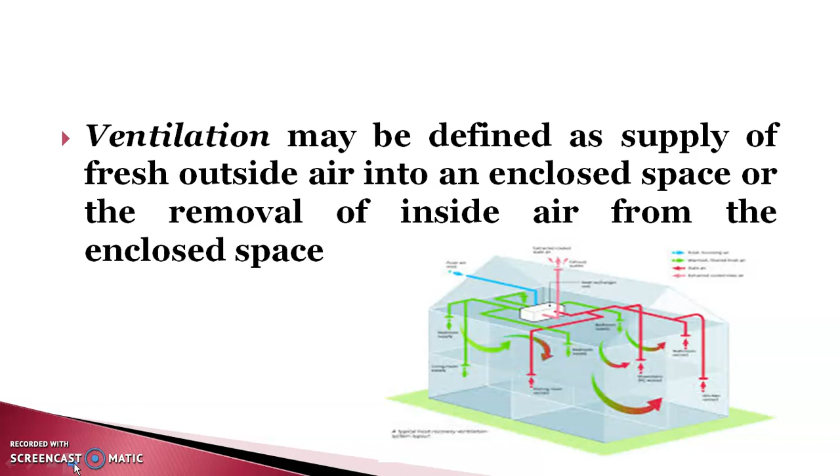Why do we need to ventilate a space? We need to ventilate for the creation of free air movement, prevention of undue accumulation of carbon dioxide exhaled by the users, prevention of flammable concentration of gas vapors from locations like kitchens, and prevention of accumulation of dust and bacteria carrying particles.

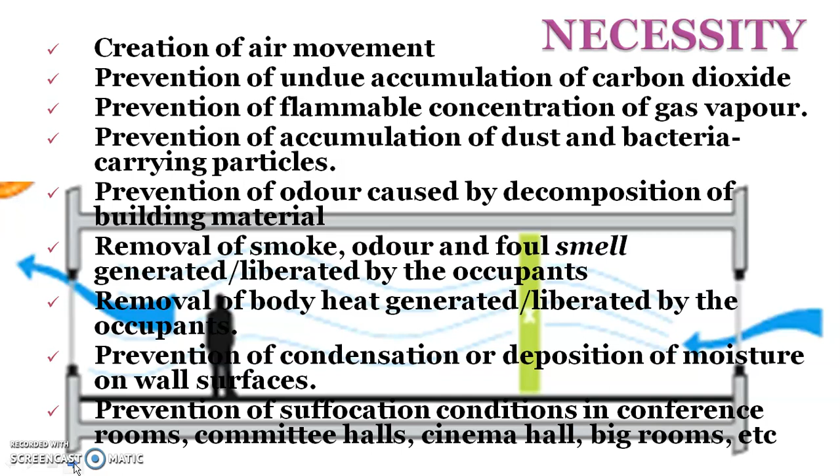Other reasons include removal of smoke, odor and foul smell generated by occupants, removal of body heat generated by occupants, prevention of condensation or deposition of moisture on wall surfaces, and prevention of suffocation conditions in large rooms like conference rooms, committee halls, cinema halls, and big rooms.

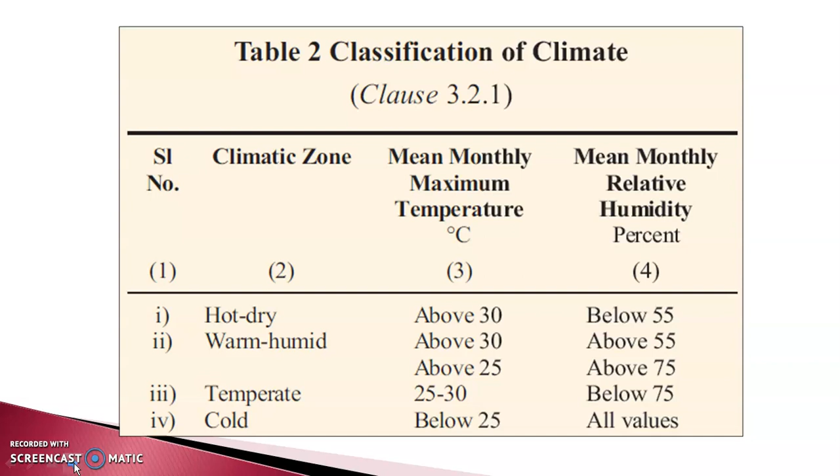This table shows the different classification of climate. These are recommendations from the National Building Code of India, clause 3.2.1, which divides the zones of India into different climatic zones like hot dry, warm humid, temperate and cold. The mean monthly temperature and mean monthly relative humidity conditions generally divide the climate into these various zones.

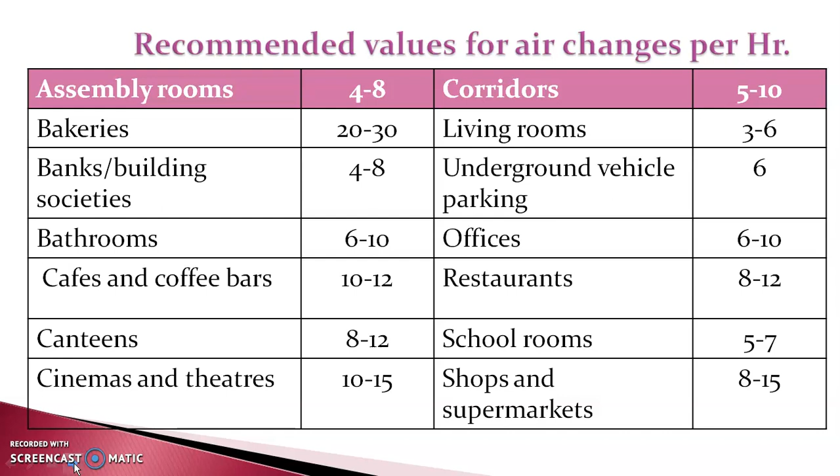Meaning, if an assembly room has a volume equal to x meter cube, then we need to change its air at least 4 to 8 times the x meter cube so that effective ventilation can be achieved. These values differ for different rooms, and we need to follow these conditions for effective ventilation.

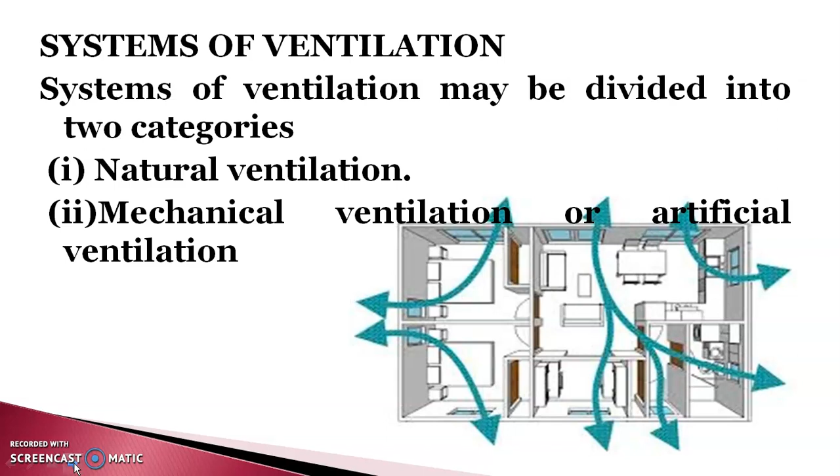Systems of ventilation may be divided into two categories: natural ventilation and artificial or mechanical ventilation. Natural ventilation is effected by the elaborate use of different openings like doors, windows, ventilators and skylights. It is usually considered suitable for buildings and small houses.

However, it is not useful for large buildings, offices, halls, auditoriums and large factories, where the volume is very large and the openings are comparatively smaller, so the expected amount of air change may not be achieved just by natural forces. In natural ventilation, cross ventilation is normally relied upon to secure air movement. It is economical since no equipment is required for keeping the room ventilated.

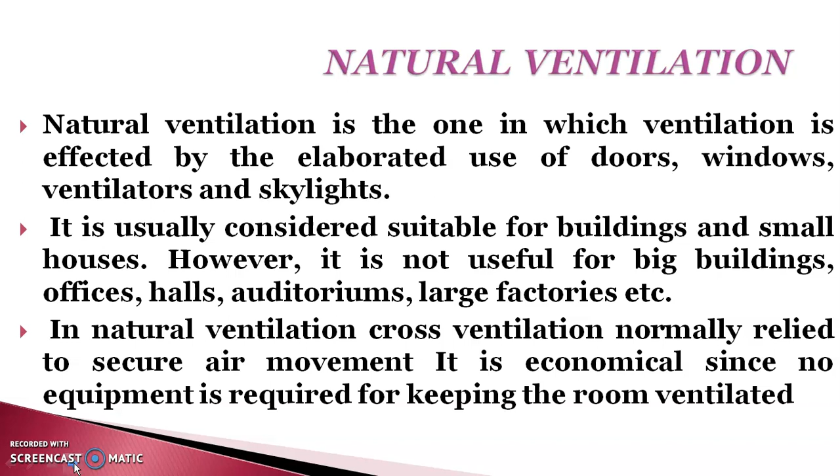In natural ventilation, the rate of ventilation depends on two effects: wind effect and stack effect.

In wind effect, the rate of ventilation depends upon the direction and velocity of wind outside, and the size and position of openings. Such an effect is known as ventilation due to wind action. In designing a system of natural ventilation, the aim should be to make effective use of wind forces.

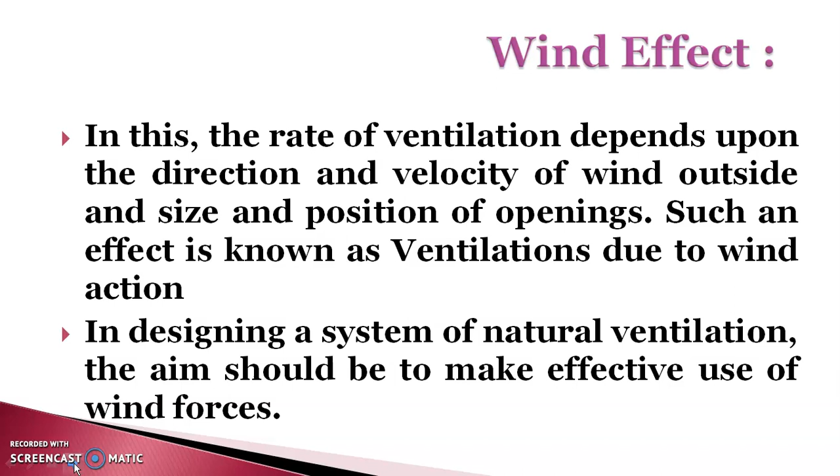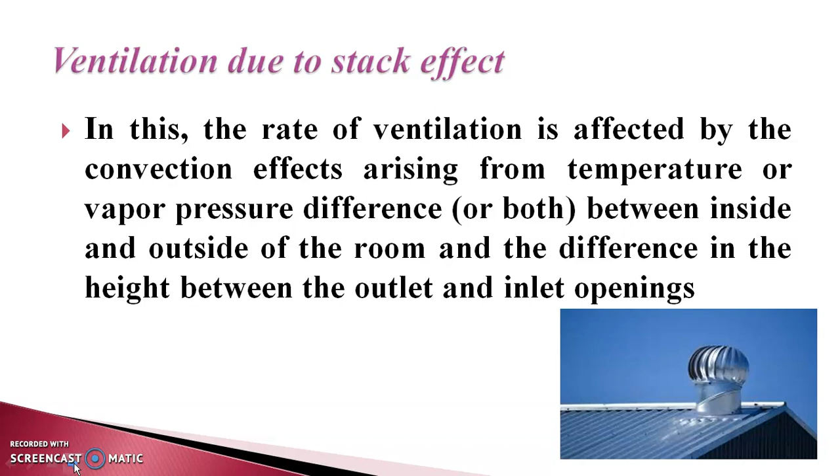Ventilation due to stack effect: here, the rate of ventilation is affected by convection arising from temperature or vapor pressure difference, or both, between inside and outside of the room, and the difference in height between the outlet and inlet openings. When air temperature inside is higher than outside, warmer air rises and passes through openings at the upper part of the room, while incoming cool air enters from the lower opening. This is the major principle used in this type of natural ventilation.

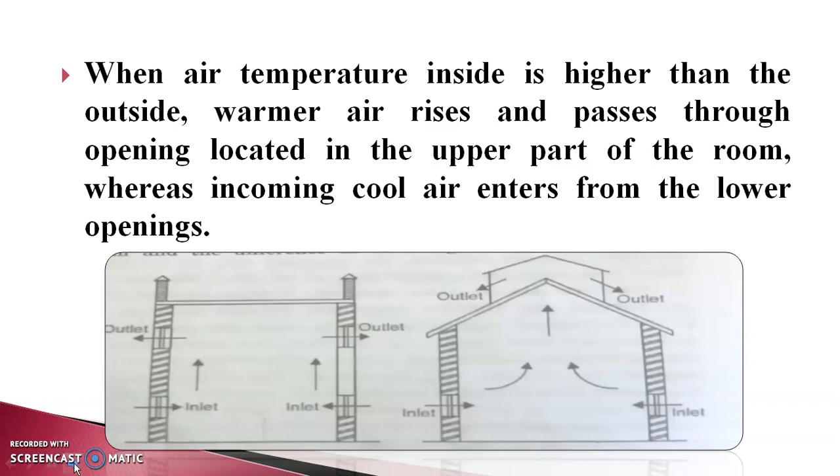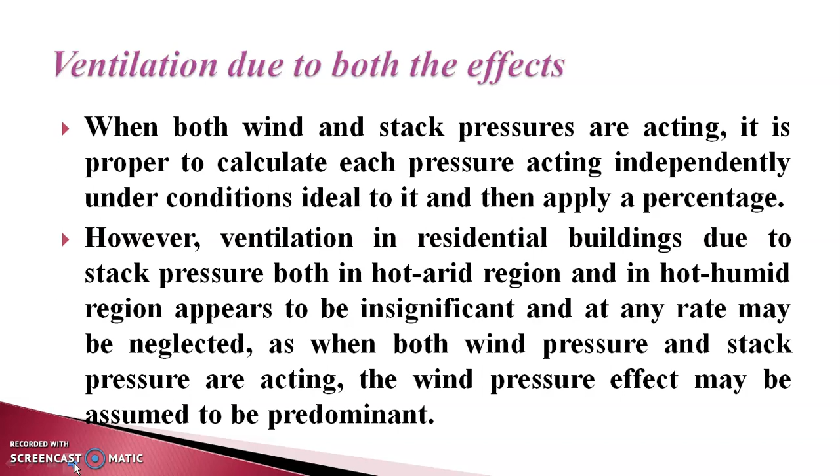When both wind and stack pressure are acting, it is proper to calculate each pressure acting independently under ideal conditions and then apply a percentage. However, ventilation in residential buildings due to stack pressure, both in hot arid and hot humid regions, appears insignificant and may be neglected, as when both wind pressure and stack pressure are acting, the wind pressure effect may be assumed to be predominant.

Next is mechanical or artificial ventilation. It involves the use of mechanical equipment for effective air circulation. It is provided where satisfactory standards of ventilation in respect of air quality or controllability cannot be obtained by natural means. This system is costly, but results in considerable increase in the efficiency of persons.

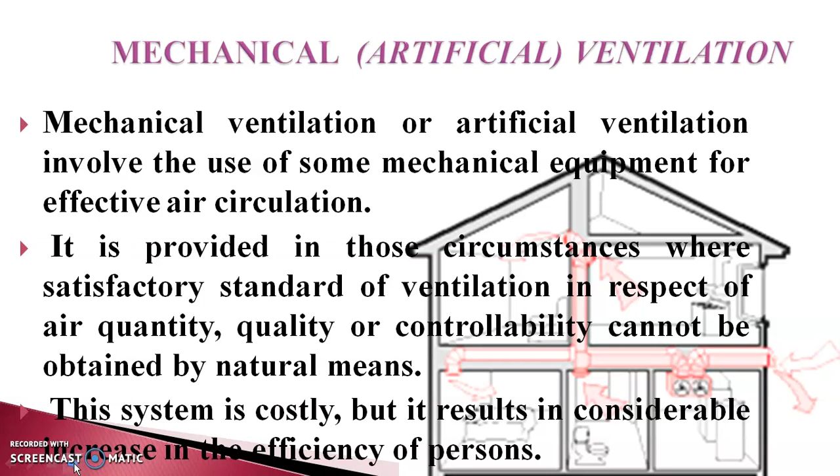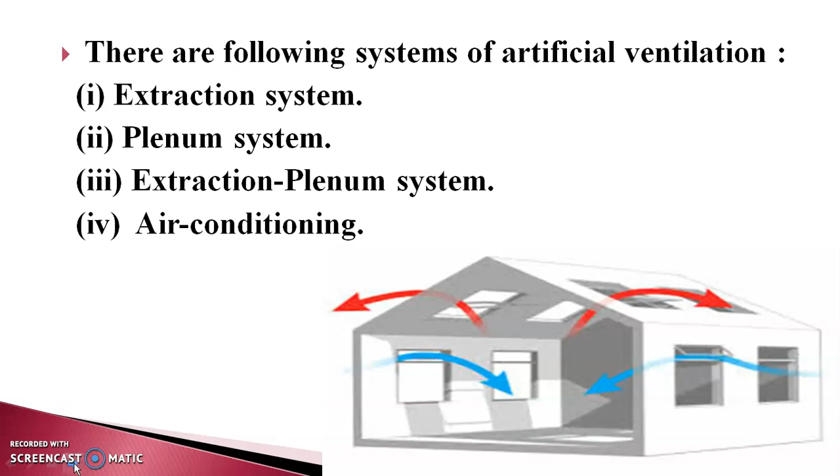There are following systems of artificial ventilation. First is extraction system, second is plenum system, then the combination of these two, extraction plenum system, and the air conditioning.

In extraction system, which is even called an exhaust system, vacuum is created in the room by exhausting the stagnant or inside air by means of propeller type fans, popularly known as exhaust fans.

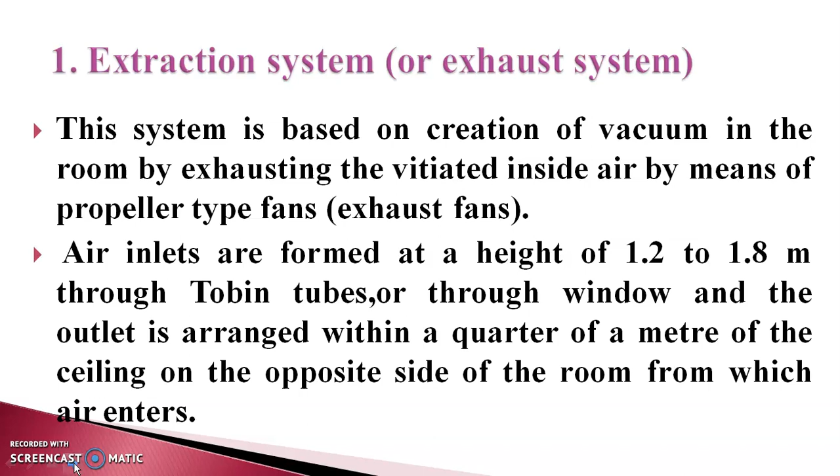Air inlets are formed at a height of 1.2 to 1.8 meters through Tobin tubes or through windows, and the outlet is arranged within a quarter meter of the ceiling on the opposite side of the room from which air enters.

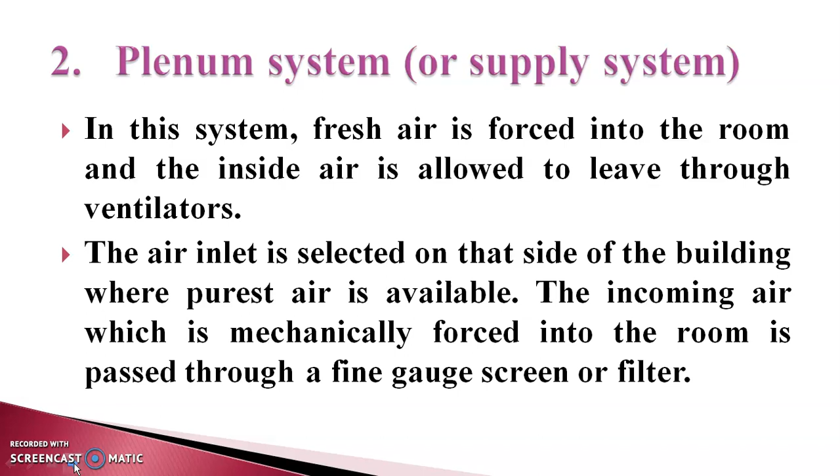Plenum system or supply system: in this system, fresh air is forced into the room and the inside air is allowed to leave through ventilators. The air inlet is selected on that side of the building where the purest air is available most of the time. The incoming air, which is mechanically forced into the room, is passed through a fine gauge screen or filter.

In winter, the air may be forced through a battery of hot water tubes and heated before being forced into the room. In case of big halls or factories, distribution of this air is done through properly formed sheet iron ducts with properly dimensioned branches. This ventilation system is costly and is used for factories, conference halls, theaters, big offices, etc.

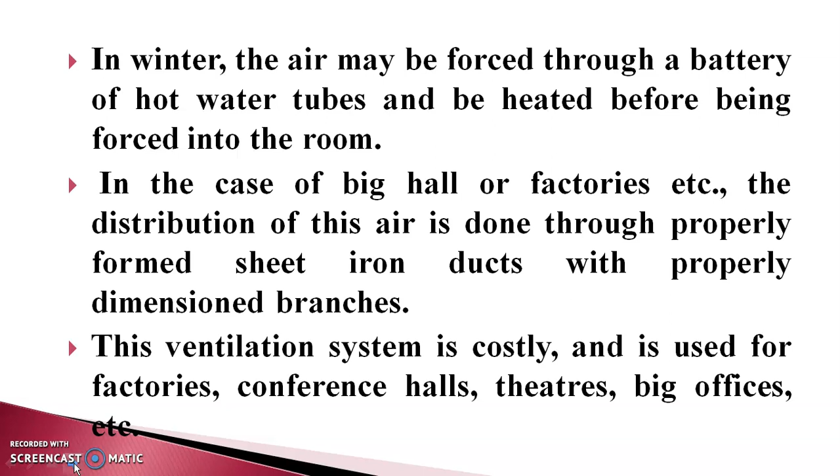Extraction plenum system: this is an extension of the plenum system in which extraction fans are used for the exit of vitiated air from the room. This system is adopted where delivery of fresh air is either sluggish, or where it is desired to discharge vitiated air containing obnoxious fumes, as from kitchen, latrine, or various manufacturing processes in specially isolated areas.

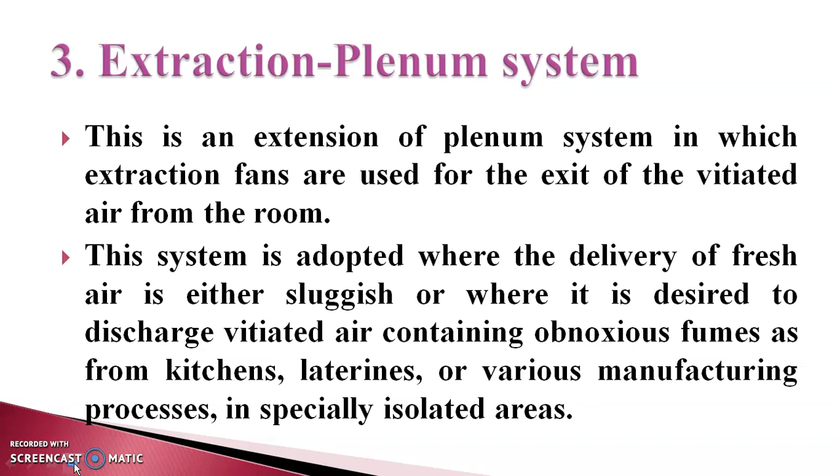Air conditioning: Air conditioning may be defined as the process of treating air so as to control simultaneously its temperature, humidity, purity and distribution to meet the requirements of the conditioned space.

This is the best system of artificial ventilation, in which provision is made for filtration, heating or cooling, humidifying or dehumidifying, etc., thus creating the most comfortable working conditions.

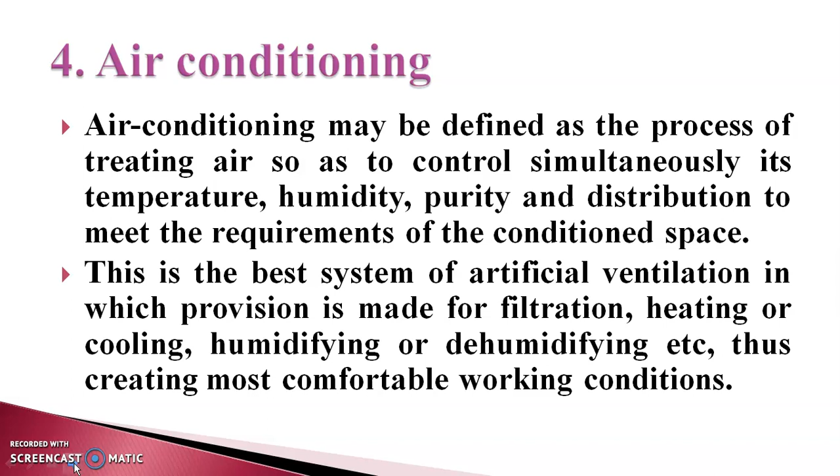Necessity or purpose: in residential buildings, it is required to preserve and maintain the health, comfort and convenience of the occupants. In case of industries, air conditioning may be required to preserve the quality of the industrial product and to create, control and maintain the working of different processes such as artificial silk, cotton cloths, etc.

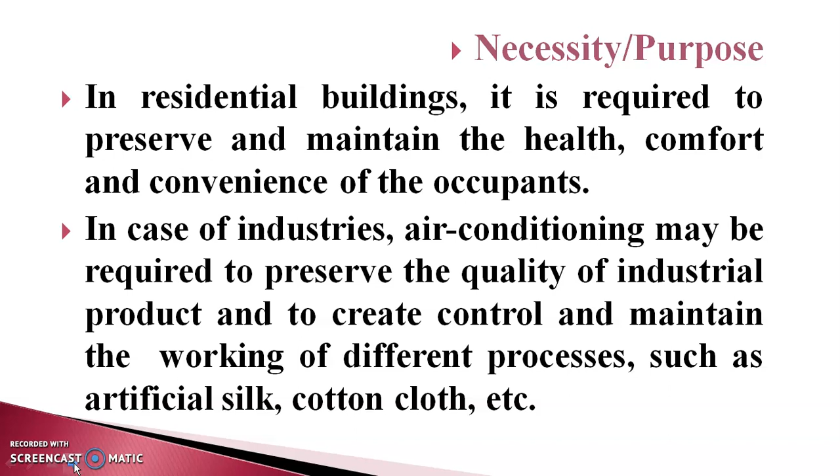Classification: from the functional point of view, air conditioning is classified into two types: comfort air conditioning and industrial air conditioning. In comfort air conditioning, such conditions of the air inside the room are created as would give maximum human comfort.

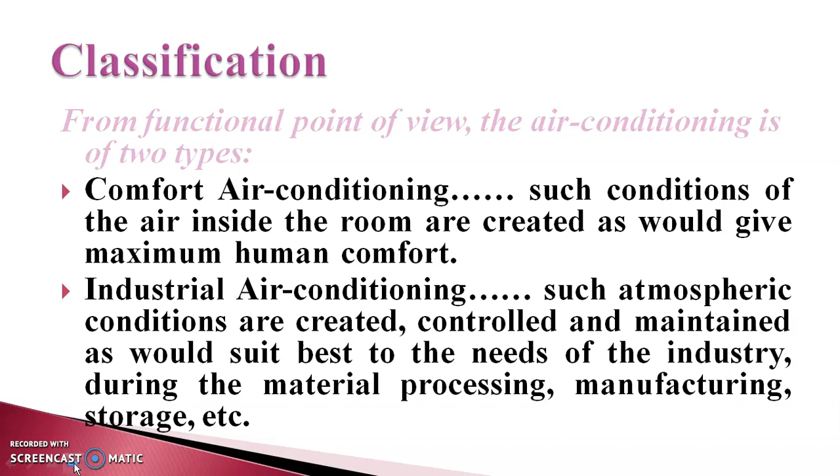In industrial air conditioning, such atmospheric conditions are created, controlled and maintained as would suit best the needs of industry during material processing, manufacturing and storage, etc.

Components of air conditioning system: the following are the essentials of an air conditioning system. Air conditioning systems have filtration and a heating system, which is essential for supplying air at higher temperature.

These are essential in the winter season. Then a cooling system, which is more essential in the summer season. Then humidification and dehumidification as per the need, and air circulation or distribution.

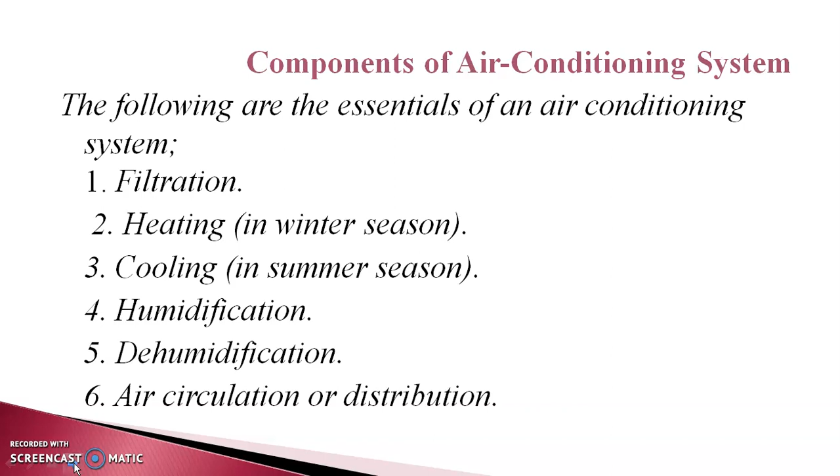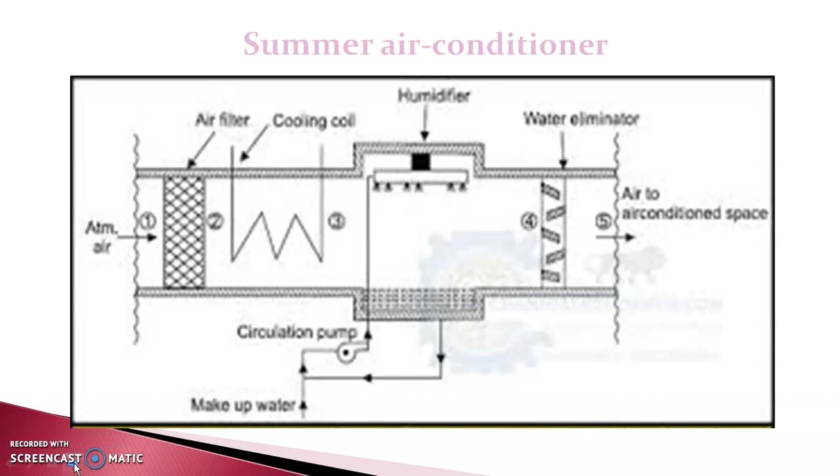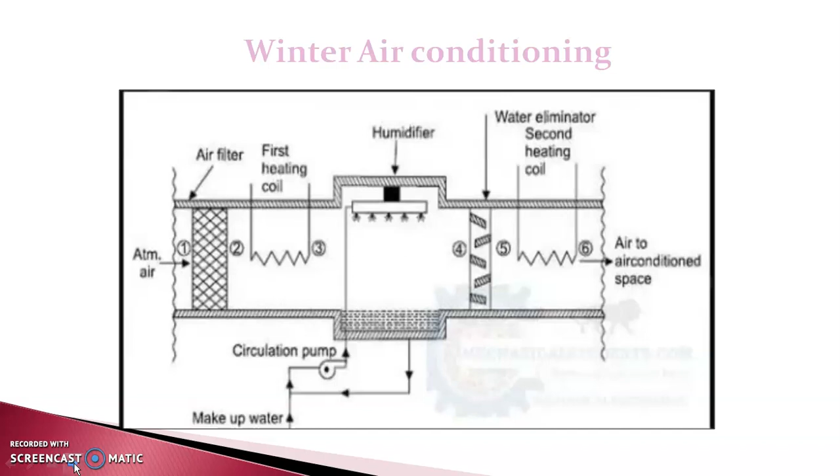Then this is connected with the second heating coil, and then it is connected with the space to be conditioned, or the ducts through which the conditioned air can be circulated.

Systems of air conditioning: depending upon the location of air conditioning equipment, the systems are classified as central system, self-contained or unit system, semi-contained or unitary central system, and combined system.

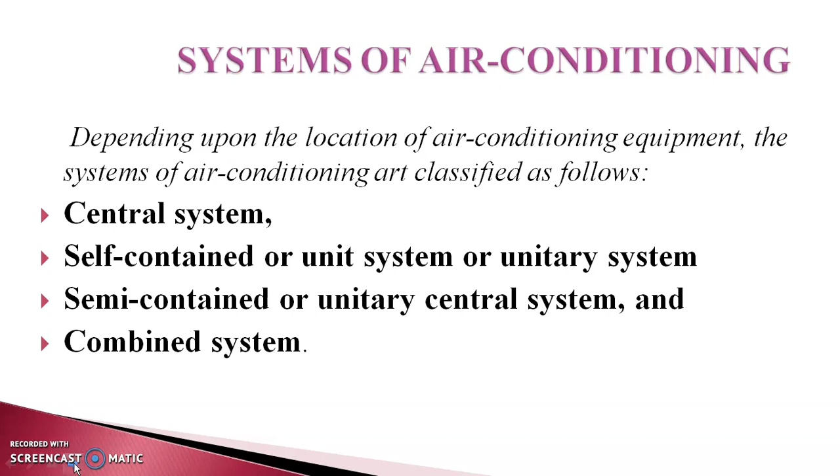The major principles involved in air conditioning are: it sucks the air through the filtering media, then cools it in case of summer or heats it in case of winter, then dehumidifies if it is to be cooled or humidifies if it is to be heated, forcing it into the room for proper circulation through grills.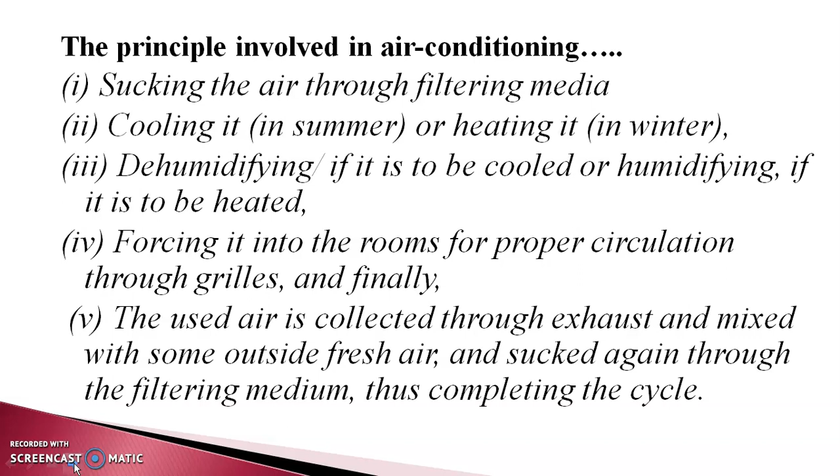Finally, the used air is collected through exhaust and mixed with some outside fresh air and sucked again through the filtering medium, thus completing the cycle. So thank you for attending this session.